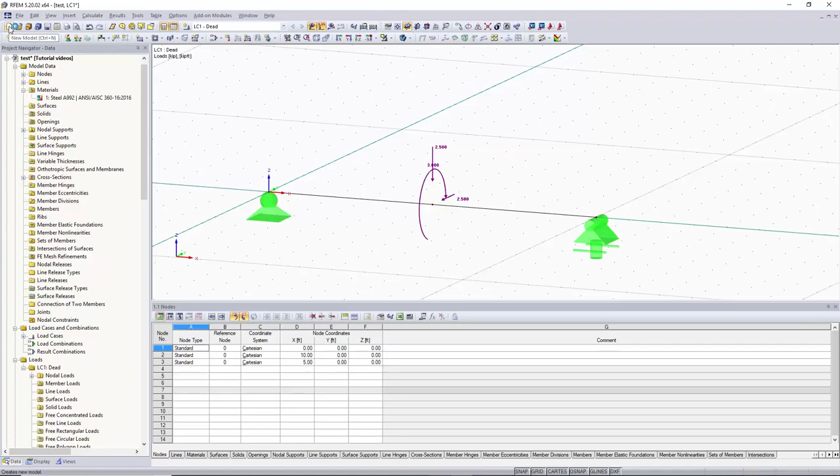To start off, we will create a new model by going up to the new model button. We can call this model video 6. Everything in here looks okay, so we'll click OK.

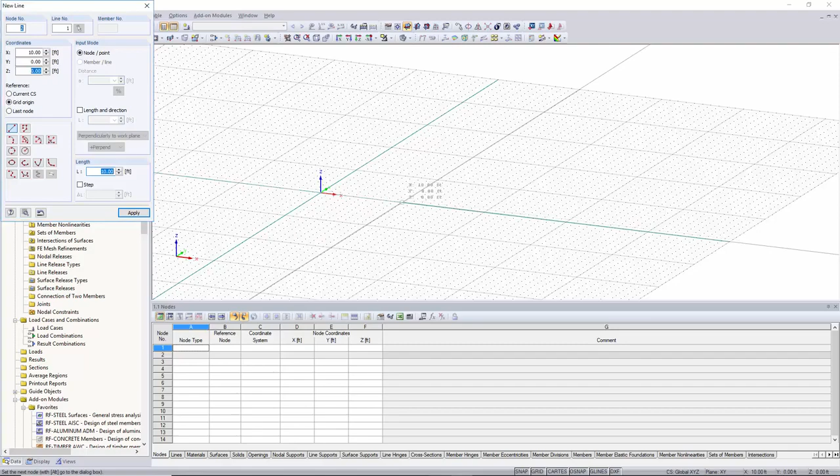As you can see, we have a blank grid where we can create our simple span beam, and to do this we'll just go to new line, and we'll just make it a simple beam from the origin 10 feet away along the x-axis. Now that we have our simple line, we'll add some line supports to this.

Our first end support will be a fully fixed support, and then our second end support, we will have to create a new one, and we're going to make this one restrained rotation about the x-axis, and we're going to allow it to move in the x direction. We'll click OK, and then we can graphically assign it to our beam.

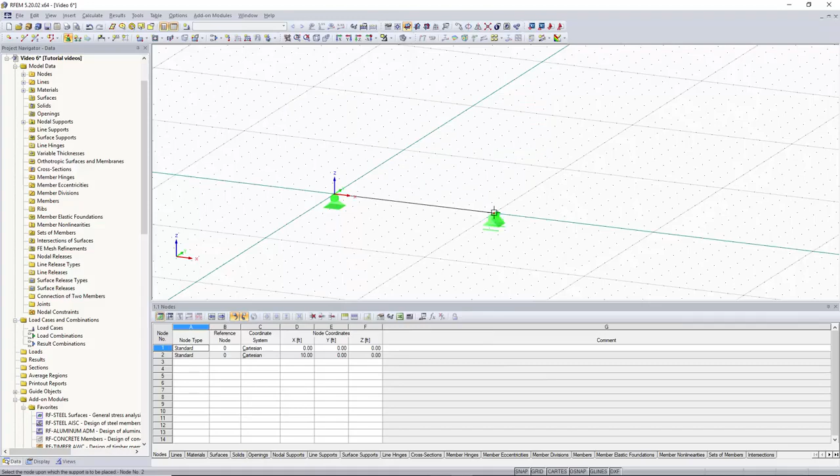Now that we have our beam, we would like to apply nodal loads to our beam. To do this, we can go up to this button up here called New Nodal Load. Since we don't have a load case created yet, when we click on a new load, it's going to ask us to create a new load case, and this pop-up window will come up.

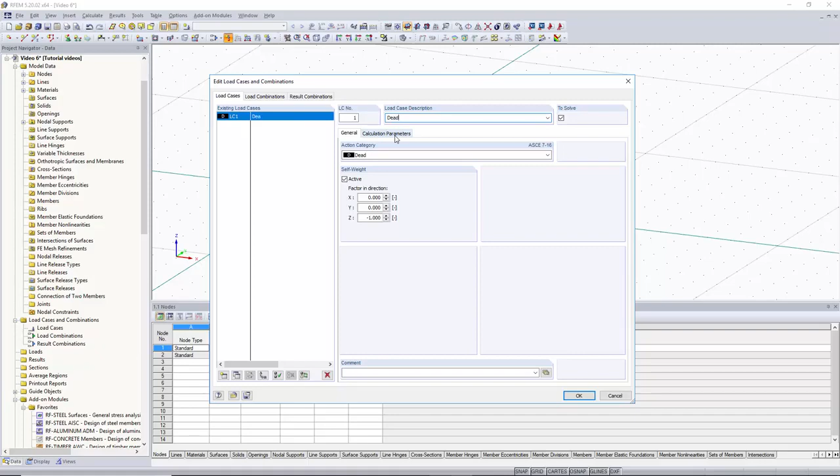For our load case, we'll just keep the action category as dead, and we'll name this one dead load. The self-weight is activated, and that's okay. We'll click OK. Now our new nodal load box pops up.

And as you can see, you can pick which way you want your point force to go, either the X, Y, or Z direction for your point force. And on the right side, you can create a moment and pick which axis you want this moment to rotate about. For now, we'll have a -3 kip force in the Z direction.

And we can also apply a rotational moment about the y-axis, and we can make this one 3 kip feet. In the bottom right hand corner of this window is a graphic area that shows you the loads that you are about to apply to whatever node you're going to graphically select.

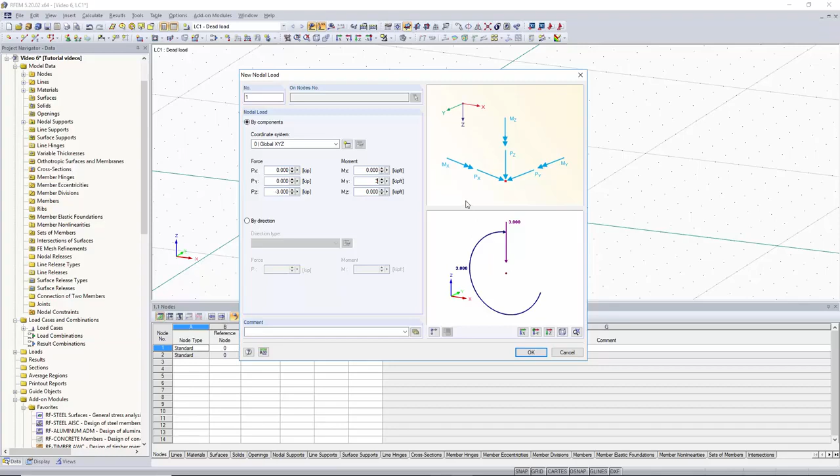Once you hit OK in this window, you will see that your cursor has an icon next to it. This means that you can apply these loads to any node you would like. For now, we'll just click on one of our end nodes, and now you can see graphically the loading that's applied. We can right click anywhere in the graphic area, and this will cancel out our selection.

Now you can see there are no nodes along the span of our beam. If you want to apply a load somewhere along the span of the beam, you're going to have to add a node. So to do this, we can go up here to the button called New Node, and now you can add a node using the coordinates, or you can also do it graphically.

Right now we'll do it graphically, and you can see that when selecting, your cursor will snap to the exact midpoint of the beam, which is 5 feet. We'll left click, and then we'll right click anywhere in the window, and now you can see that we have a node in the middle of our span.

With this node here, we can go up to our new nodal load button. We already have our load set. We can also change any of the loads if we would like, or add a load, or decrease or increase the load. We can click OK, and now we can click on the node that's in the span of our beam and apply the loads that we want to. We'll right click anywhere in the graphical area to cancel out the tool.

And now I'd like to show you how to add nodes to multiple points on the beam instead of just the midpoint. We'll delete our loads, and we can also, by highlighting the node from left to right, select it without selecting the beam and hit delete.

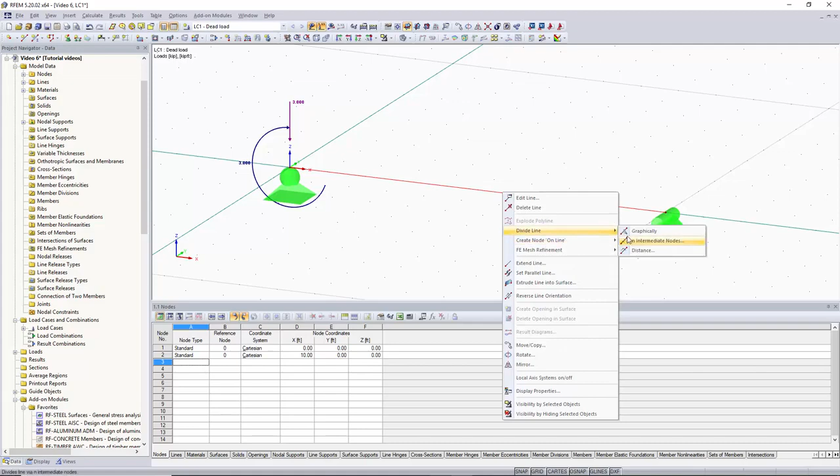To add multiple nodes to the beam easily, we can go to the line, right click, and click on divide line, and we can do this graphically. You can see this pop-up window comes up where you can pick the spacing and the difference between the spacing and apply nodes that way. Or you can also, which is nice, go into the graphical area, and you can see that the points on the grid act as snap points for if you want to place nodes anywhere that correspond with the grid points.

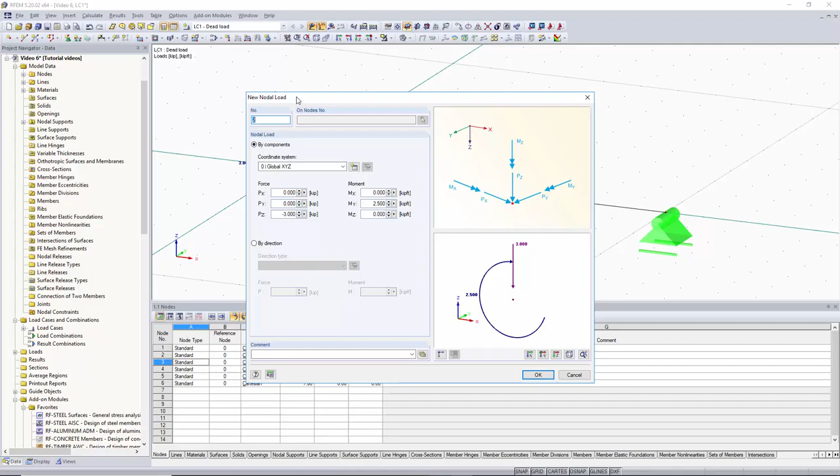So click on the grid point 4, and then that splits up the beam right there at that point. And we can also keep splitting up the beam at these grid points. We click divide and we click exit, and now you can see that our beam has been split up at these grid points that it is connected to. We can then go to our new nodal load button and click OK, and then we can click on our nodes and add our nodal loads to them very easily.

As you can see, our member was divided up into separate members. We can easily get rid of these loads by clicking Ctrl Z and get rid of our nodes. And now our line is back to just being one single line with no divisions. You can also right click on the line and divide the line by n intermediate nodes. So now you can pick how many nodes you would like to divide the line by. We'll keep it as 1, and we'll click OK. And now you can see that it equally divides the line up with one node in the middle.

Now if we would like to divide the line by the first quarter of the line, we can right click on the line, select divide line, and go to distance. The first thing we would like to choose is type of division. We're going to divide the line by new intermediate nodes. You can also place a node without dividing a line if you'd like. We're going to do this using the true member length of 10 feet. You can see how this works up in this graphic area.

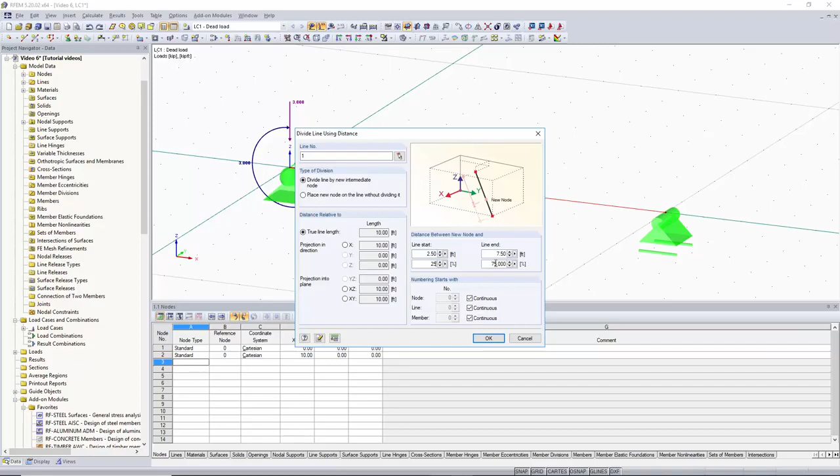And then we want the node to be placed 25% of the member length away from the start of the line, which is 75% of the member length away from the end of the line. And you can see that automatically adjusts over here. So we'll click OK. And now we have a node that's 2.5 feet away from the beginning of the line. And we can apply our nodal loads by clicking new nodal load, clicking OK, and clicking on the node.

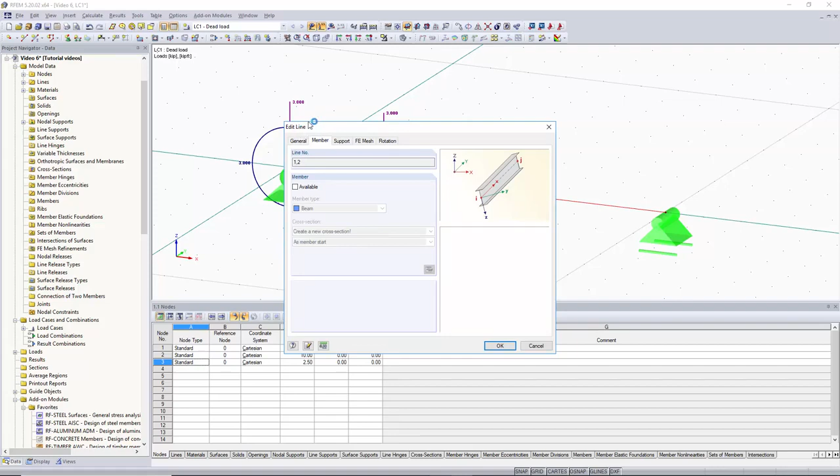Now we would like to run our results. Right now there's no cross-section or material set to our line, so we're going to select both of our line segments, double click on them, and then the edit line box will come up. Up here in the member tab, we want to click member available. We can then go to our cross-section library and select which cross-section we would like to apply. We'll just apply a W30x90, click OK.

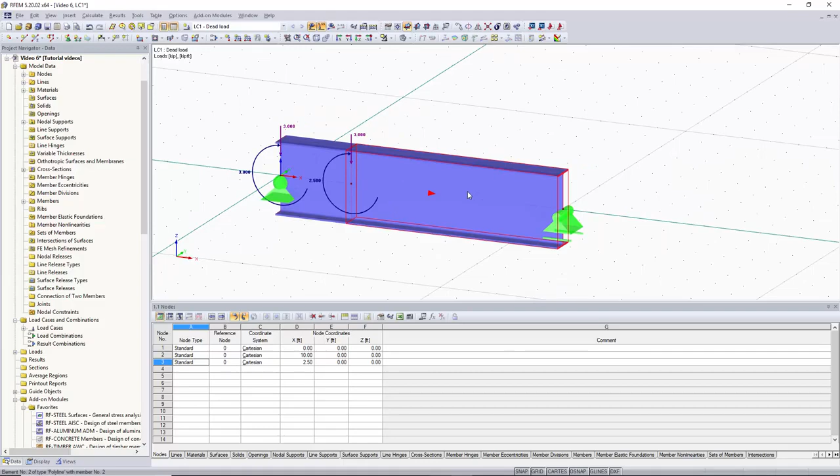And as you can see, our material is set to steel A992. We'll click OK. We'll click OK again, and now we have our rendered cross-section and material along with our loads. We'll run the results, and as you can see, turning this into wireframe view, we get our deformation along with our member diagrams for our moments and our shear.

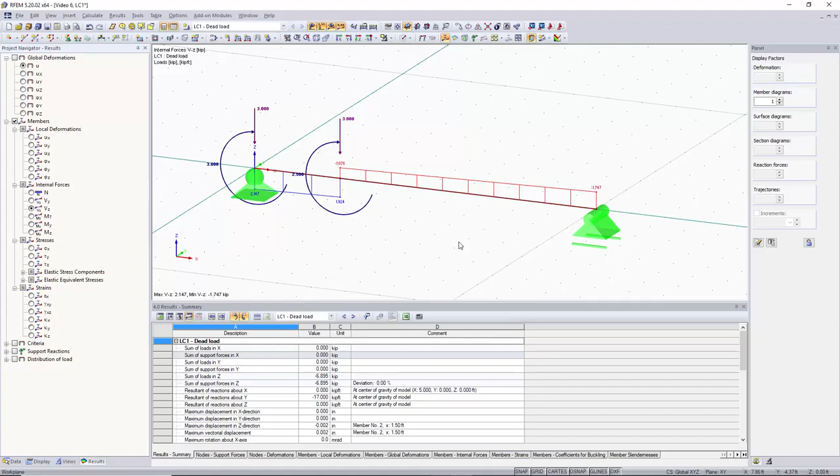So thank you for watching. I hope this video is useful, and now how to apply nodal loads is more familiar to you. In the next video, I will be going over how to quickly apply a set of point loads organized as a member load.